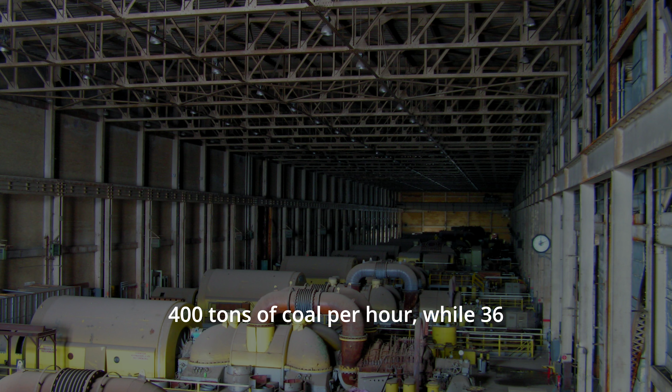At its peak in the 1960s, the Hearn was a behemoth of power generation, a vibrant industrial hub. Its boilers consumed an astonishing 400 tons of coal per hour, while 36 million gallons of cooling water from Lake Ontario were needed hourly for its turbines and equipment. The turbine hall itself, almost 300 meters long, housed 8 turbine generator sets, a truly impressive sight for the up to 600 people employed there.

The Hearn served as a vital training ground for Ontario's energy workforce. Many operators, maintainers, and technicians began their careers at the station, later moving on to other Ontario Hydro plants, including the province's CANDU nuclear stations. However, this industrial might came at a significant cost. The station's initial 8 shorter chimneys were a constant source of air pollution, spewing fly ash and other particulates into local neighborhoods and downtown Toronto, contributing heavily to the city's infamous smog problem.

This period highlights a societal shift in what constitutes progress. Initially, the focus was almost solely on raw industrial output and economic growth, with the environmental consequences largely unaddressed. By the late 1960s, an emerging environmental movement put immense pressure on authorities to address the pollution. The response was monumental. In 1971, the 8 short chimneys were demolished and replaced by a single, colossal smokestack, standing 215 meters tall, one of the tallest in the world at the time, costing $9 million.

Electrostatic precipitators were also added for the 200 megawatt units. This dramatically reduced air pollution, and the area around the plant even became known for good fishing and recreation. This expansion of the definition of progress to include mitigating negative externalities like pollution, though a compromise reflecting the technological and economic realities of the time, marked a significant step in environmental consciousness.

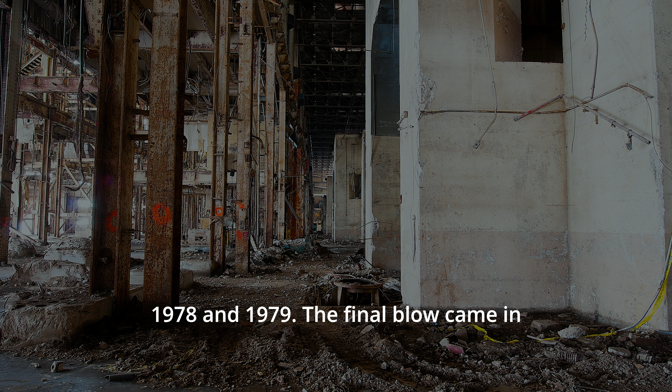The Hearn's reign as a primary power generator began to wane in the late 1970s. Units 1 to 5 were mothballed between 1978 and 1979. The final blow came in July 1983, when the last 3 200 megawatt units, which had briefly resumed burning coal alongside natural gas, were phased out of operation. The reasons for its decommissioning were multifaceted: growing concerns about increased air pollution in Toronto, despite the new smokestack and gas conversion, and a provincial energy landscape now characterized by an abundant energy supply, largely from nuclear power. With power production ceased, the plant's massive workforce dwindled.

Staff levels plummeted from 600 at its peak to around 180 when power production stopped in 1983, with many taking early retirement or transferring to other sites. A skeleton crew of about 10 remained until 1995, maintaining the electrical control room and switchyard, and operating some generators as synchronous condensers to improve Toronto's power quality—a quiet, lingering heartbeat of a once mighty machine.

This decline illustrates the profound economic and social aftermath of industrial decline. While environmental improvements and a shift in energy policy were driving forces for closure, the human cost was significant, with hundreds losing their livelihoods. This highlights the complex trade-offs inherent in large-scale energy transitions, where technological advancements can render once vital industries obsolete, leaving behind social and economic voids.

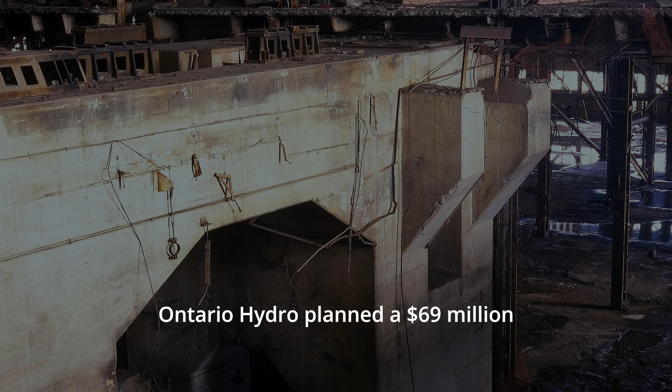Despite its official closure, there were several attempts to bring the Hearn back online in the 1980s and early 1990s, proposing natural gas, cogeneration, or even, bizarrely, burning medical waste. The closest it came was in 1990, when Ontario Hydro planned a $69 million restart of 2 units for the winter of 1991, only for the project to be cancelled by the New Democratic Party government.

The physical dismantling began gradually. By 2004, the ground floor was undergoing demolition, with only columns and scrap piles remaining. All 8 generators were finally removed and scrapped in 2007, coinciding with the opening of the nearby Portlands Energy Centre, a new natural gas plant.

The Hearn then sat largely empty and neglected for decades, its exterior showing cracks, and its interior prone to flooding from burst rainwater leaders. Its complex ownership structure, involving provincial, federal, and private leaseholders, further complicated any attempts at a cohesive future. The dangers of this abandoned industrial giant became tragically real in 2008 when an urban explorer lost his footing and died after falling into an old coal chute.

Film crews who later worked on site described it as toxic, with an electrical inspector refusing to enter, highlighting the severe contamination and safety hazards of the Brownfield site. This underscores the persistent shadow of industrial contamination.

Decommissioning a large industrial plant is not a clean, simple process of turning off the lights. It involves confronting a deep-seated legacy of environmental contamination and physical hazards that remain decades after operations cease. The toxic label is not just a figure of speech but a real, ongoing threat, demonstrating that the environmental footprint of heavy industry extends far beyond its operational life, requiring long-term management and investment for true closure and revitalization.

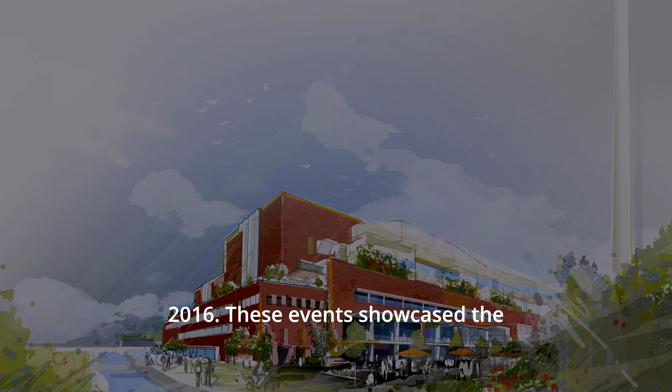The Hearn also found a vibrant, albeit temporary, role as a cultural venue, most notably hosting the Luminato Arts Festival in 2014 and 2016. These events showcased the building's cathedral-like aspect and its potential as a public space, breathing new life into this incredible structure.

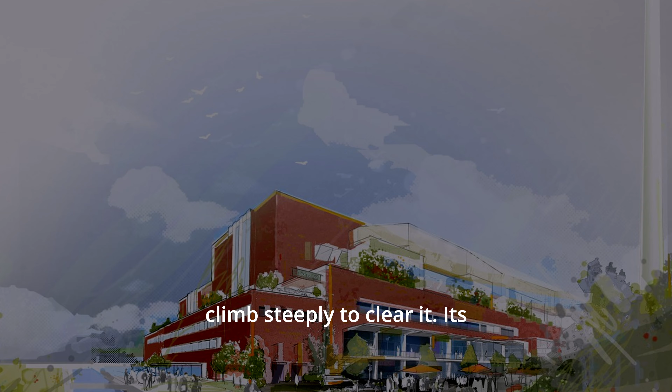The building's sheer size is staggering. It is almost as big in volume as the Rogers Centre, with a smokestack standing over 700 feet tall, so high that jets from the island airport must climb steeply to clear it. Its clear-span space could accommodate 4 NHL ice rinks end-to-end, and its incredibly well-founded, concrete structures, built to withstand massive turbine vibrations, are likened to ancient Roman catacombs. These attributes highlight the inherent architectural and structural value of the site, despite its past.

However, repurposing such a giant comes with immense challenges. Decades of neglect have left the building with cracks and internal flooding from burst rainwater leaders. Its ownership is notoriously complicated, involving provincial, federal, and private entities. Most critically, it is an industrial brownfield property that requires massive remediation before it is fit for human occupancy, with film crews describing it as toxic and an electrical inspector refusing to enter due to the conditions.

Despite these hurdles, a bold vision for the Hearn district has emerged. Developers Cortel Group, Partisans, and SVN have unveiled a plan to transform the 13.17-hectare site into a vibrant mixed-use community. This ambitious proposal includes up to 8,400 residential units, offering a mix of market, affordable, workforce, and family housing, alongside commercial, retail, office, and entertainment spaces.

The plan centers on preserving the Hearn's industrial character while integrating modern urban design. Proposed features include public spaces like Smokestack Plaza and Hearn Plaza, a realigned pedestrian and cycling-friendly Unwin Avenue, and enhanced connectivity via a water taxi landing and a pedestrian/cycling bridge over the ship channel.

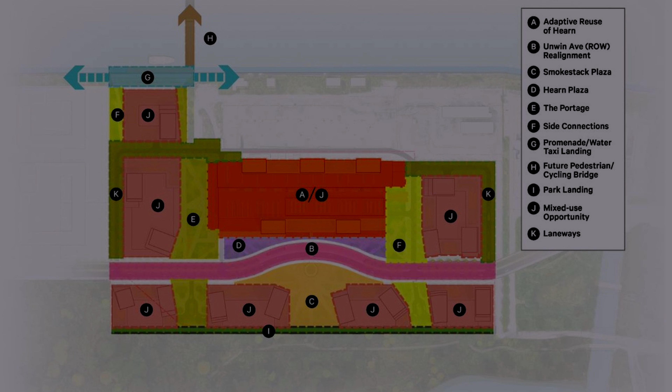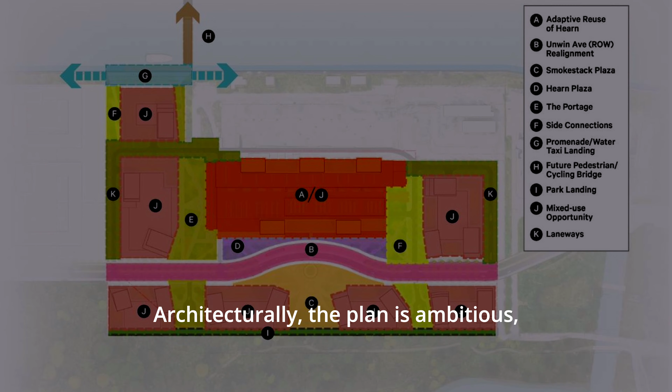Sustainability is a key focus, with proposals for geothermal systems, bioswales for stormwater, and a district energy network aiming for a net-zero carbon footprint. Architecturally, the plan is ambitious, proposing 5 new towers rising directly from the Hearn building itself, alongside 7 new development blocks, each with 2 towers.

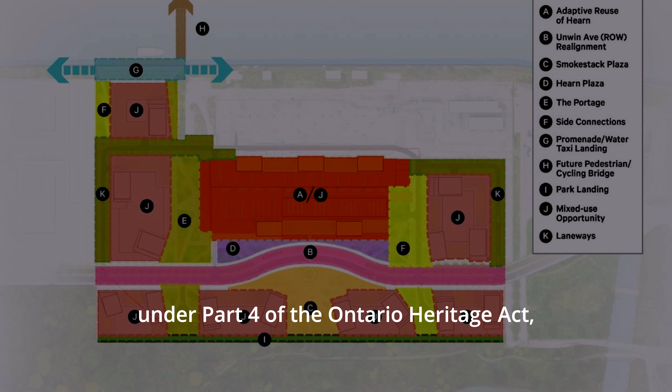The Hearn site has also been designated under Part 4 of the Ontario Heritage Act, and an official plan amendment application has been submitted to the City of Toronto, signaling a formal step towards this ambitious future.

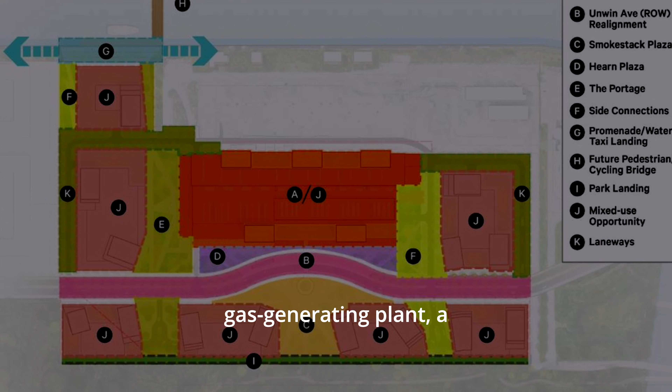However, a significant point of contention exists within this grand vision. Some assessments state the property is not suitable for residential development because it is too close to the Portlands natural gas generating plant, a modern 550 megawatt facility that became fully operational in 2009 and is planning upgrades to 600 megawatts. This raises critical questions about the feasibility and safety of the proposed residential component, given the ongoing industrial activity and the site's brownfield status.

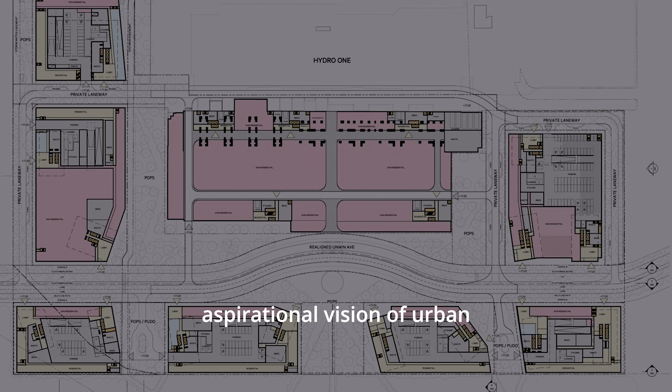This direct contradiction highlights a fundamental tension between the aspirational vision of urban transformation and the practical realities of environmental legacy and existing industrial infrastructure. The success of the Hearn district hinges on overcoming these profound challenges, particularly the suitability for residential use and the extent of environmental remediation required.

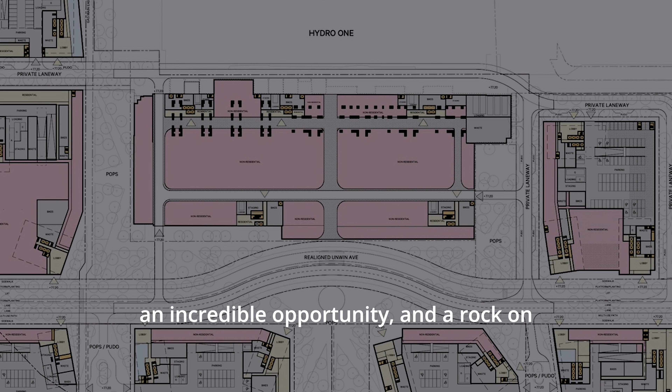Despite these complexities, the Hearn is widely described as a unique civic asset, an incredible opportunity, and a rock on the waterfront. Its transformation is framed as creating a new community that honors Toronto's history while looking to the future.

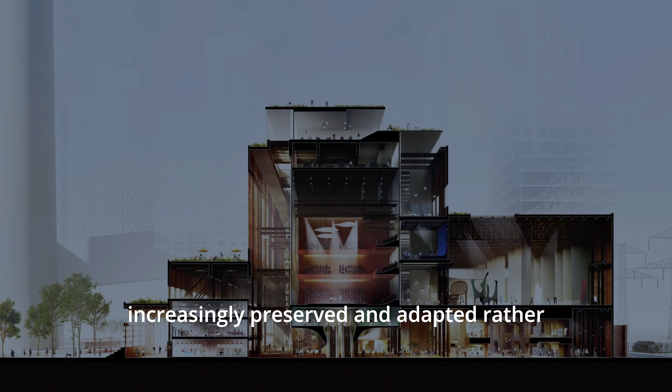This demonstrates a significant shift in urban planning and cultural values, where obsolete industrial sites are increasingly preserved and adapted rather than simply demolished. The Hearn's immense scale, robust construction, and unique aesthetic are recognized as inherent assets that can anchor new development, becoming a catalyst for revitalizing entire districts like the Port Lands. This aligns with global trends of industrial heritage preservation, such as London's Tate Modern.

The Richard L. Hearn Generating Station is more than just a decommissioned power plant, it is a monumental testament to Toronto's relentless growth, its evolving relationship with energy, and its journey towards environmental consciousness. From its birth as a coal-fired giant powering a booming post-war city, through its struggle with pollution and its eventual conversion to natural gas, the Hearn mirrored the industrial ambitions and environmental awakening of the 20th century.

Its long period of abandonment, marked by decay and danger, yet punctuated by bursts of cultural life, has only deepened its mystique. Now, as plans for the Hearn district unfold, this industrial relic stands poised for a dramatic rebirth, aiming to transform a site of past pollution into a model of sustainable, mixed-use urban living.

The Hearn's complete life cycle embodies a profound circularity in urban development. A natural space was transformed by urban waste to enable industrial growth. That industry then generated its own waste and obsolescence, leading to its closure. Now, the industrial relic itself is being retransformed, aiming for a more integrated and sustainable urban fabric.